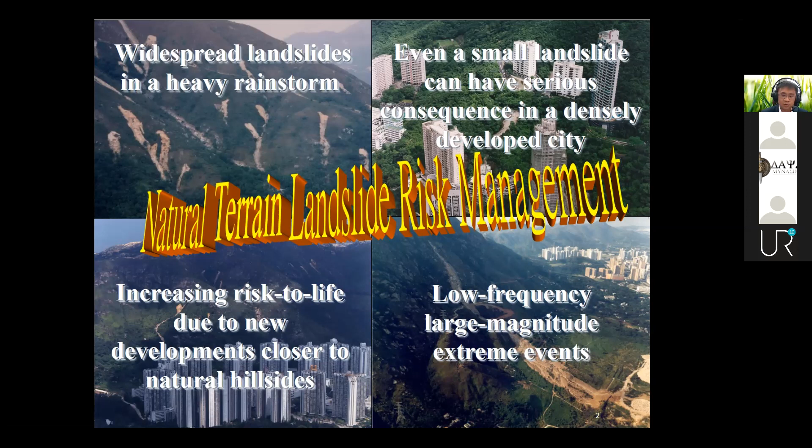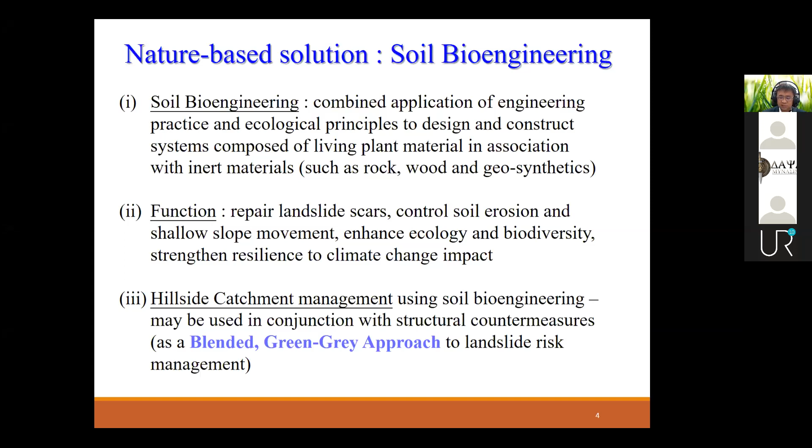Soil bioengineering, as defined in the first bullet point here, is one form of nature-based solution. Soil bioengineering measures may be used to repair landslide scars, reduce soil erosion, and prevent shallow slope movement, as well as to enhance biodiversity and resilience to extreme weather events. Where appropriate, soil bioengineering may be used in conjunction with sizable structural countermeasures as a blended green-gray approach to manage landslide risk.

Let me now take you through 2 demonstration sites in Hong Kong, showcasing the application of soil bioengineering to repair landslide scars on natural hillsides. The first site is at Cloudy Hill.

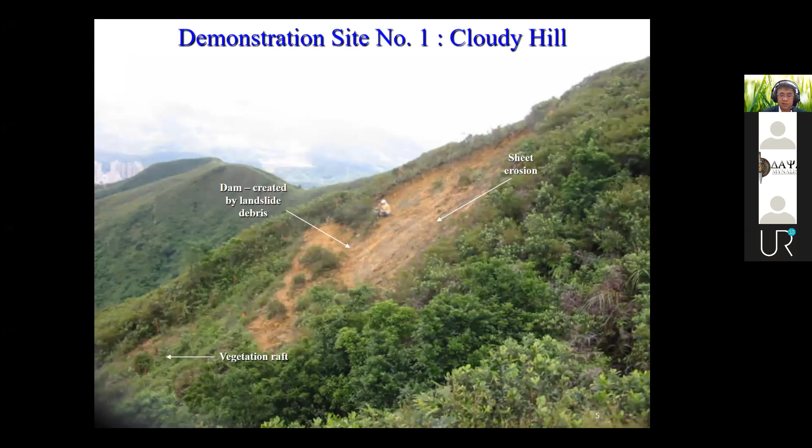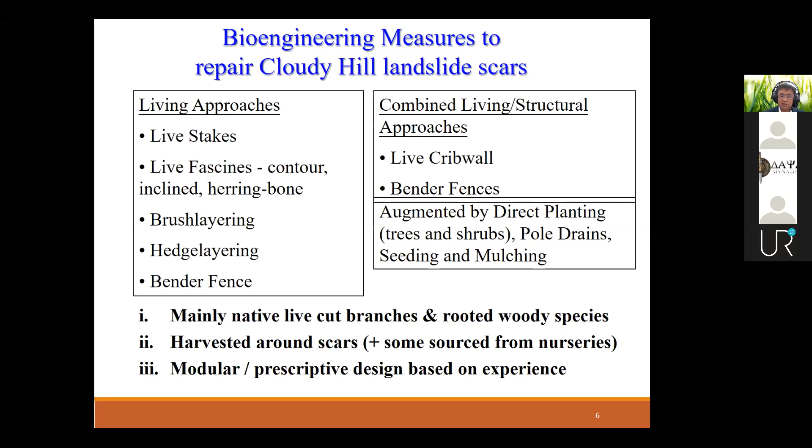This is a summary of the range of soil bioengineering measures provided, which involved mainly the use of native rooted woody species, together with native live-cut branches that were harvested from around the landslide scars. A modular design approach was prescribed by the designer based on detailed site mapping and experience. Here are some pictures of the site works in progress during the installation of the various measures.

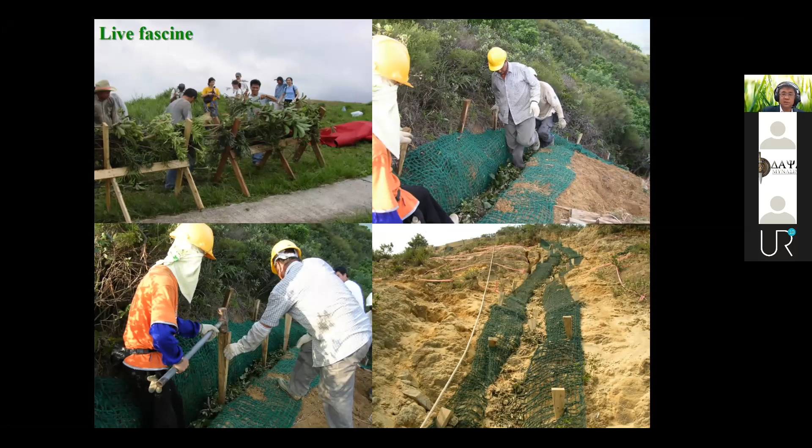Comprehensive performance monitoring is essential for quality data and improved understanding of actual performance. For example, we observed that in general, rooted plant outperformed live-cut materials in terms of short-term survival rates.

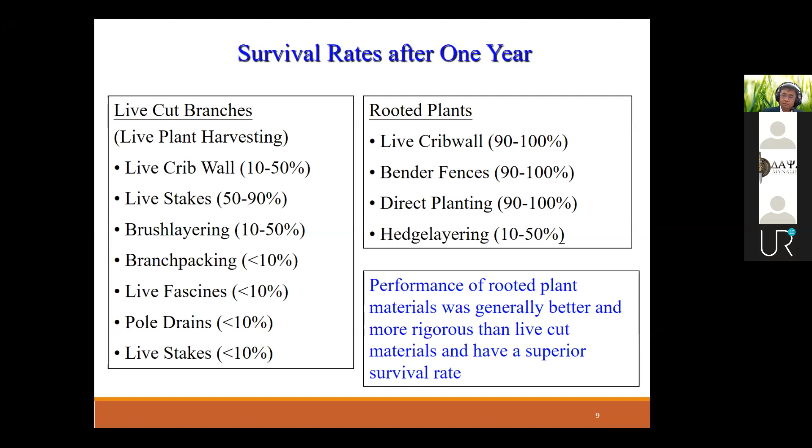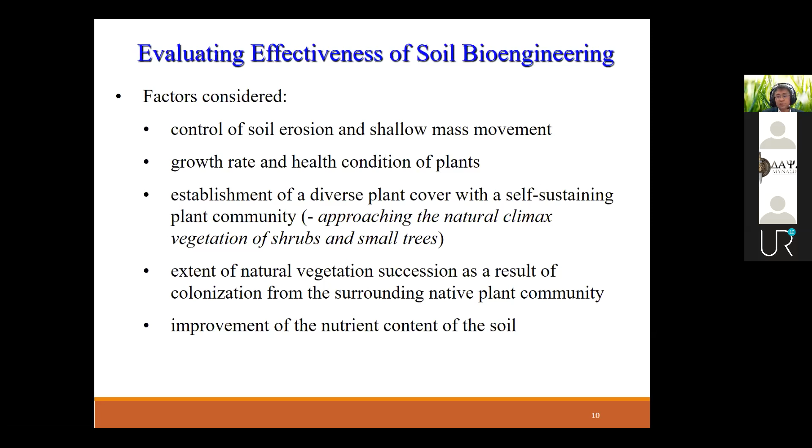In evaluating the overall effectiveness of the various measures, we considered systematically a range of factors such as control of erosion, establishment of a diverse plant cover with a self-sustaining plant community, improvement of the nutrient content of the soil, etc.

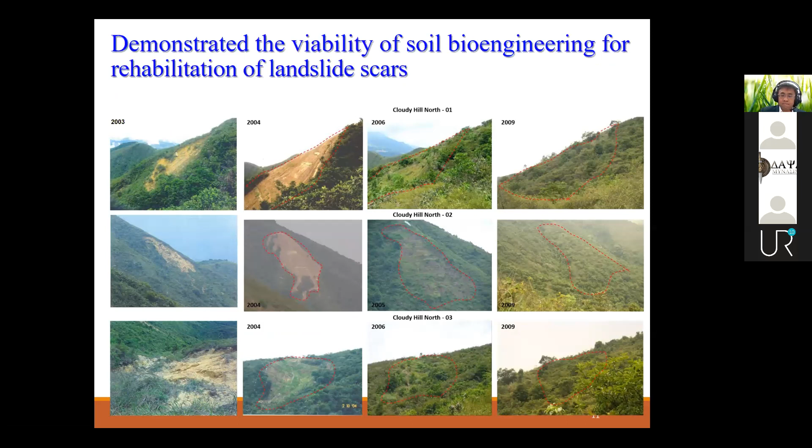The second site is in Upper Keung Shan, where soil bioengineering measures were used to replace the shotcrete cover provided to the extensive natural terrain landslide scars during the emergency repair works.

The design of the soil bioengineering works involved careful matching of suitable measures to the local site conditions, with collaborative input by the design team, comprising geotechnical engineers, ecological professionals, and arborists.

And again, locally harvested native plant materials were used as far as possible, supplemented by suitable species from nurseries.

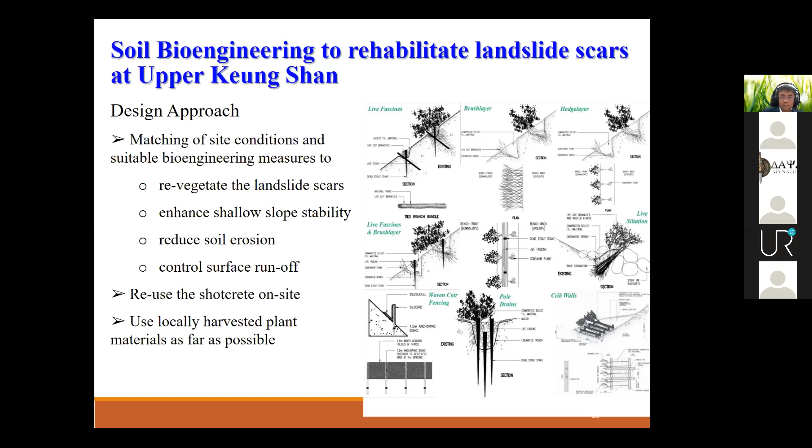The enhancement of biodiversity and ecology was achieved primarily through judicious selection of native species with suitable habitat characteristics, including the ones as shown at the bottom of this slide.

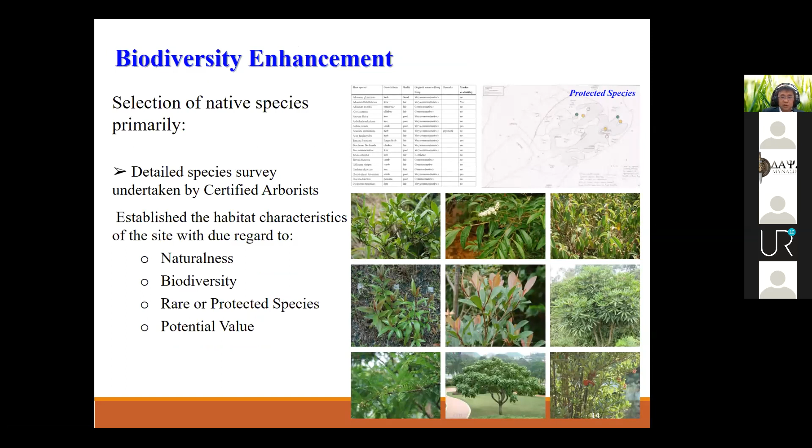To promote waste recycling, active reuse of shotcrete on site was implemented for the construction of pole drains. In total, some 250 cubic meters of shotcrete were reused.

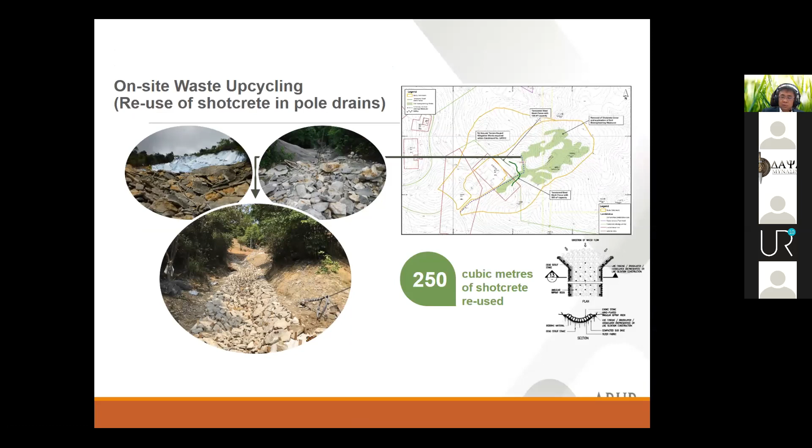The overall outcome is pretty good so far, with the gray outlook being gradually turned back into a green outlook, together with enhancement in the ecology and biodiversity.

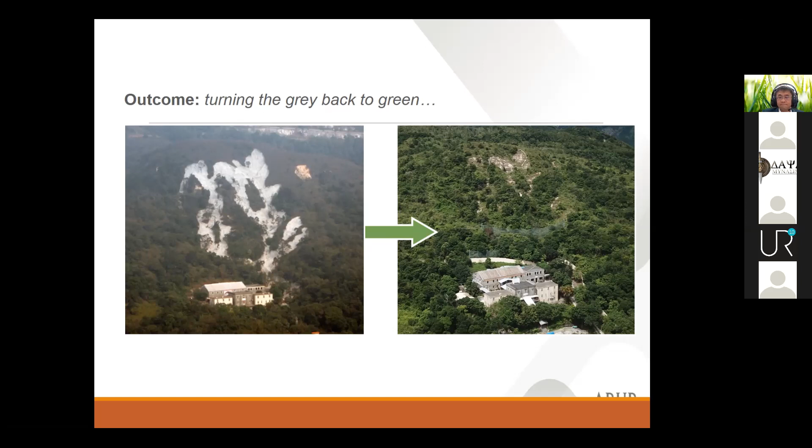We in the Geotechnical Engineering Office have promulgated best practice guidelines on the application of soil bioengineering to landslide scars, as well as the provision of a sustainable vegetation cover to man-made slopes. These guidelines are intended to promote the upscaling of the application of soil bioengineering and green landscaping treatment as a nature-based solution in practice.

And the policy of the Hong Kong government is to make the slope cover as green and as natural as possible.

Nature can also be our teacher, and it can inspire us to develop innovative measures for landslide risk management. For example, current research in Hong Kong is examining the potential use of the bioshield concept, which comprises a network of engineered mature vegetation acting effectively as a green, flexible buffer to dissipate the energy of debris flows. We are doing flume tests as well as centrifuge tests on these, with joint input from geotechnical specialists as well as ecological experts.

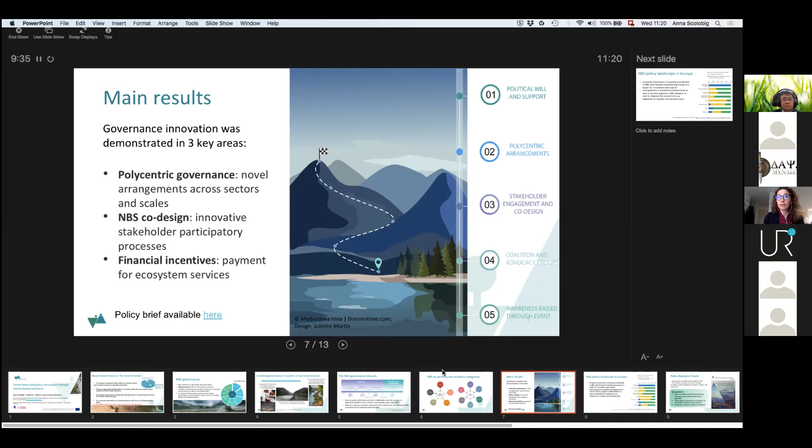Another key element was co-design and involvement of different stakeholders, which had key benefits in terms of local conflict reduction and overcoming decision stalemates. Financial incentives, like payment for ecosystem services implemented in the Chinese case, also made a real difference. There were other key enablers, and here I'll mention only the critical role played by local champions and advocacy coalitions and groups that were really driving the implementation of NBSs.

Another key aspect strongly related to governance at the local level is policy. We need robust policy and legal instruments and frameworks that allow nature-based solutions to be implemented. Our analysis here focuses on the landscape in Europe. The European Commission is investing considerably in NBSs with the goal of positioning Europe as a leader for innovation with nature, but very little guidance is provided on many aspects - for example, how to monitor progress in NBS adoption, how to integrate the concept into other types of planning, and how to integrate NBS planning more generally with other urban plannings.

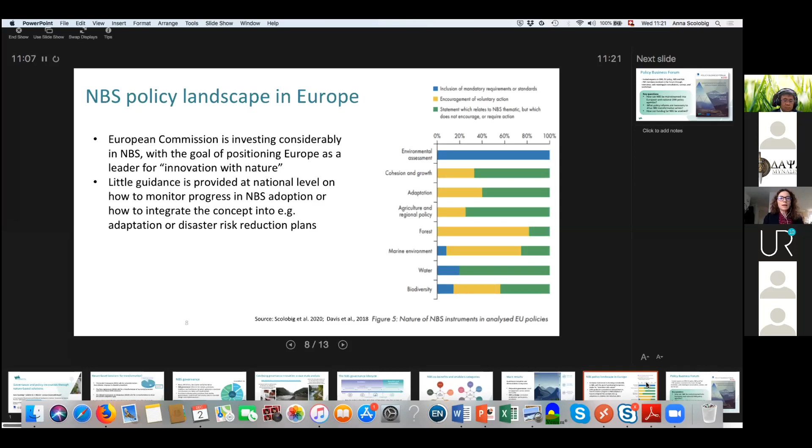In our project, we worked with a number of experts in academia, but especially in the private and public sector, to better understand these aspects related to governance and policy innovation. We set up a policy business forum and addressed questions related to how we can mainstream NBSs into policies, and what policy reforms are necessary to drive transformative actions.

And also their use of different NBS definitions can generate inconsistencies or confusion in the acquisition of possible funding. But here in the next slide, before concluding, I will focus on one key element, that is the fact that many European policy mechanisms enabling NBSs remain voluntary with no legal obligation to comply. And some of our experts mentioned some ways to foster NBS enforcement.

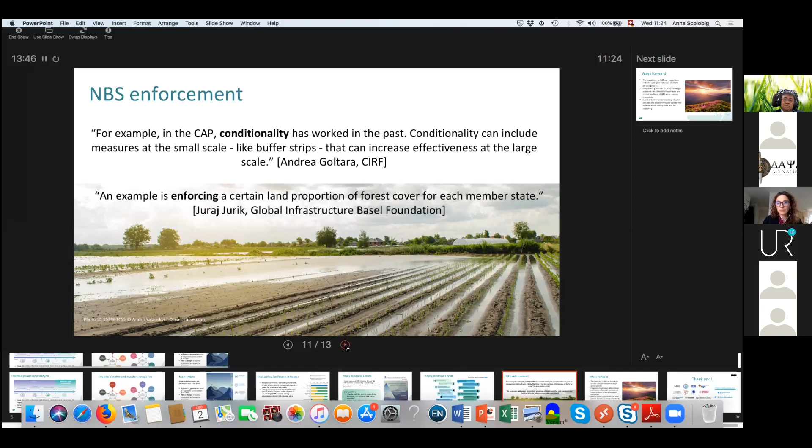For example, focusing on the Common Agricultural Policy in Europe, conditionality has worked in the past, and some measures like buffer strips at the small scale can increase effectiveness at the larger scale, and this can benefit not only agriculture but also flood risk reduction, for example. Another example is the enforcement of a certain land proportion of forest cover for each member state. So these are some directions that we should pursue if we really want to foster a transition towards more effective NBS policies and governance.

So now, summarizing my presentation with three key inputs on ways forward. As we have seen, the transition to NBSs can contribute to build synergies between multiple agendas, not only at the global level, but also at the local and regional scale. If we want to foster governance innovation, we have shown how some key elements are polycentric governance arrangements, promotion of co-design processes, and of novel financial incentives. And we also need to work more on how we can innovate and change the policy instruments that we have at our disposal, with a specific focus on NBS uptake and upscaling.

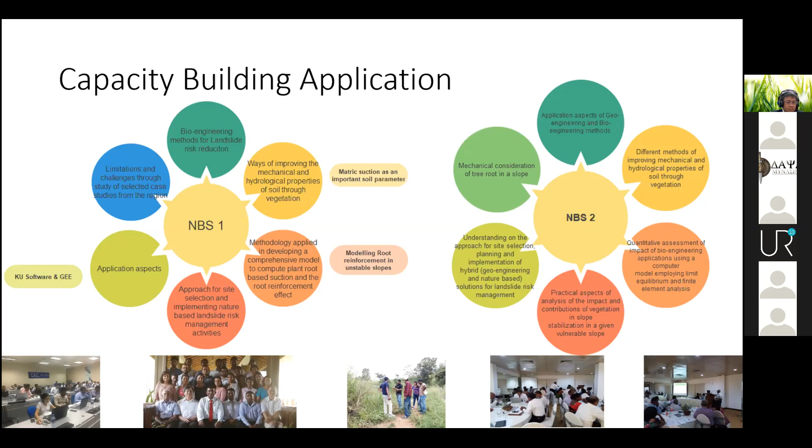So capacity building applications. Different types of training programs were conducted for promoting nature-based solutions for landslide events. In addition, basic level and advanced level knowledge building programs were conducted to provide more technical know-how on nature-based solutions. Computer-based applications such as KU software and Google Earth Engine were discussed to estimate and gather data for assessment purposes. Bioengineering methods, ways of improving mechanical and hydrological properties of the soil through vegetation, and computing plant root-based suction are the key subject areas in these training programs. In addition to that, group works and on-site training were conducted to understand the theoretical and practical backgrounds.

Analysis of plant species. The identification of relevant plant species is one of the key elements in this project, and for that we have identified a criterion to rank the plants. The criterion was based on a few variables: plant type and structural characteristics, economic values, ecological significance, root strength characteristics, and hydrological significance. Each variable was divided into several categories, and 1 to 5 marks were assigned in ascending order. The plants receiving the highest marks were the most suitable plants.

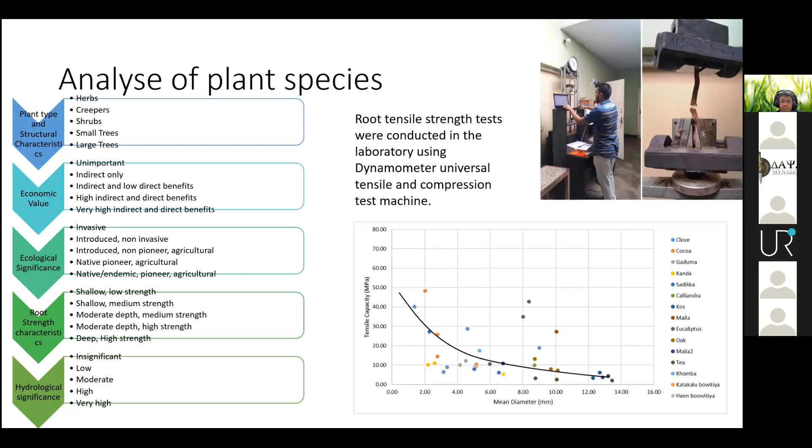Then a plant manual was developed for selecting the suitable plants for the nature-based landslide mitigation works, and the way of selecting the plants was also developed. According to the process, the plants have been identified by considering the different site-specific data mentioned in the presentation.

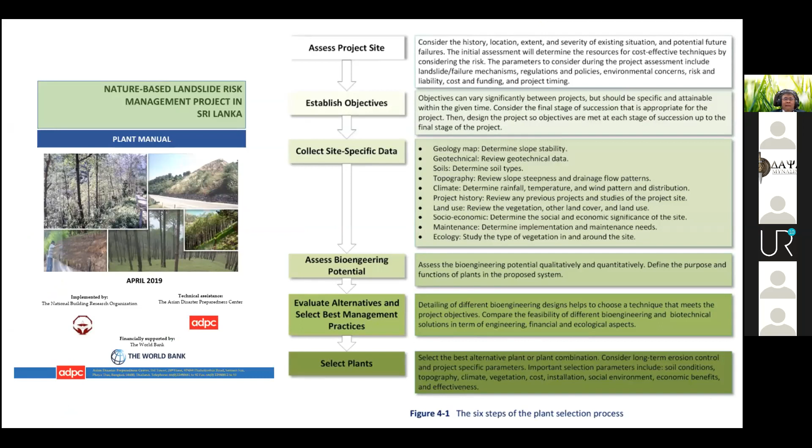The site selection criteria were developed to apply the knowledge into real practice, and for the first phase, 2 sites were selected, and 4 sites were selected for the second phase. These sites were selected by evaluating 15 sites around the country. The selection criteria consisted of depth to failure plane, slope category, suitability of creation of vegetation cover, sustainability and maintainability, and finally potential damage or probable loss.

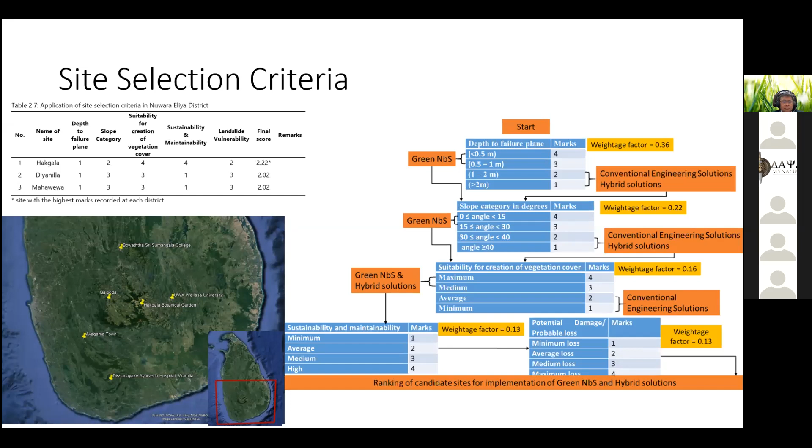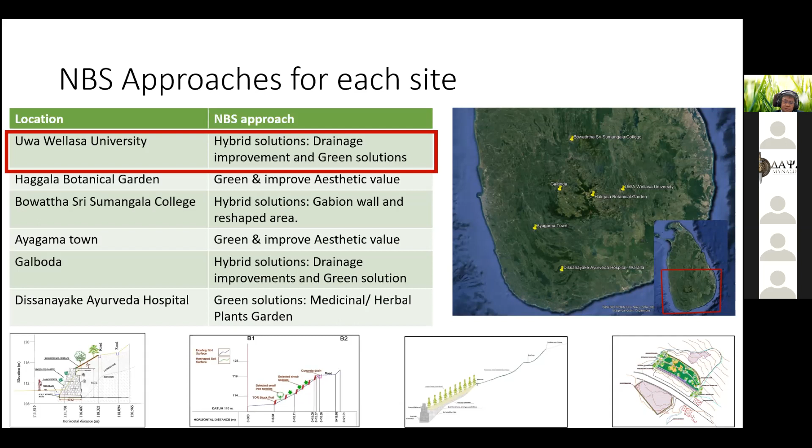perspectives. Here we are expected to brief about the first site, which is located near the Uva Wellassa University of Sri Lanka. The village name is Badulusirigama. This site is located in Badulla, which is the administrative city of Ella, a famous tourist destination in Sri Lanka. The land movements were detected 30 years ago, and afterwards a few movements were recorded.

Considering the vulnerability of the area, 95 housing units, around 355 people and infrastructure facilities were vulnerable elements due to this landslide. Considering the social status, the majority are male-headed families, and most of them are government sector employees. Most of the buildings are residential and constructed with load-bearing walls, and most houses have systematic drainage systems to control the wastewater.

69% of buildings are located on the gentle slope, and 42 housing units have landslide symptoms. The weakest point was that 71% of respondents say that they didn't receive any preparedness instructions. The landslide map program also identified that the area has significant hazard activities.

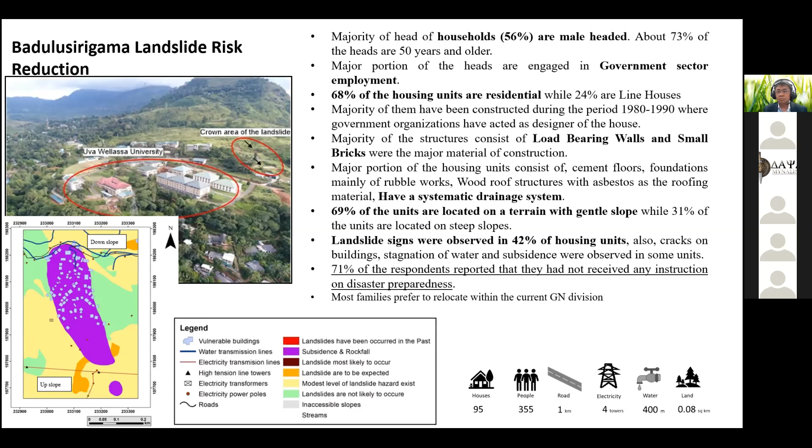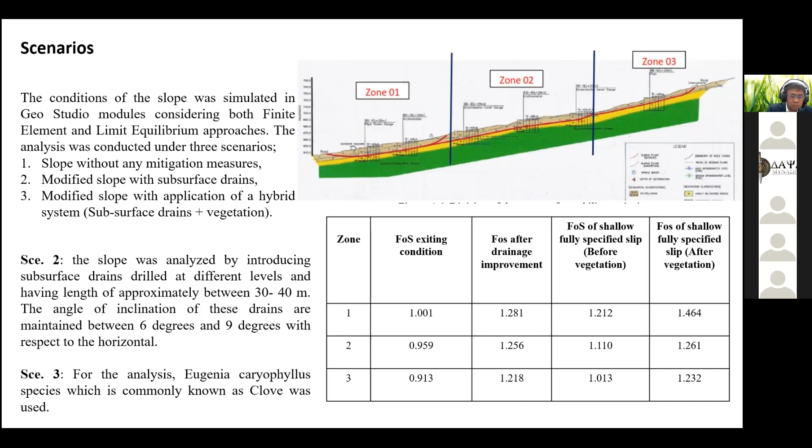Then the conceptual map was developed, and activities were identified by considering several stakeholder discussions. Accordingly, drainage improvement was conducted on the slope area, and the total area was divided into 3 zones: a community engagement zone, a university engagement zone, and the nature park with some nature trails. Now this plan is implemented on the

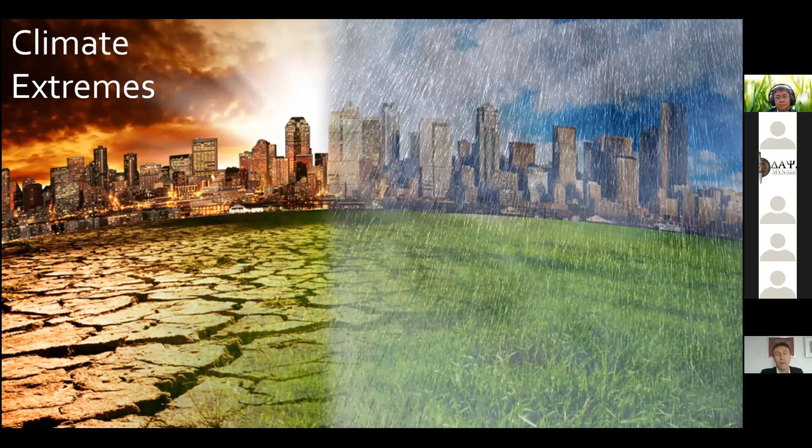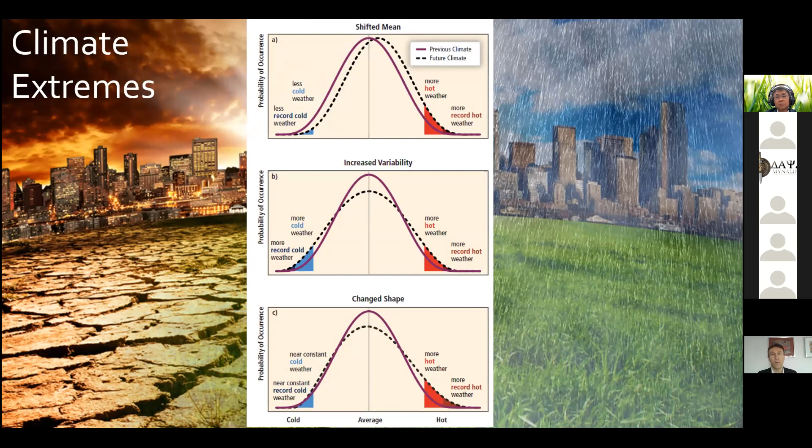Basically, as an introduction to this, I don't think I need to spend much time saying that there's so much evidence that we are facing quite some climate extremes nowadays. Once upon a time these used to be from one year to another, but now we have many examples around the globe where people within one season experience two wet periods and then two dry periods. As a consequence of that, we have seen some major events occurring around the world.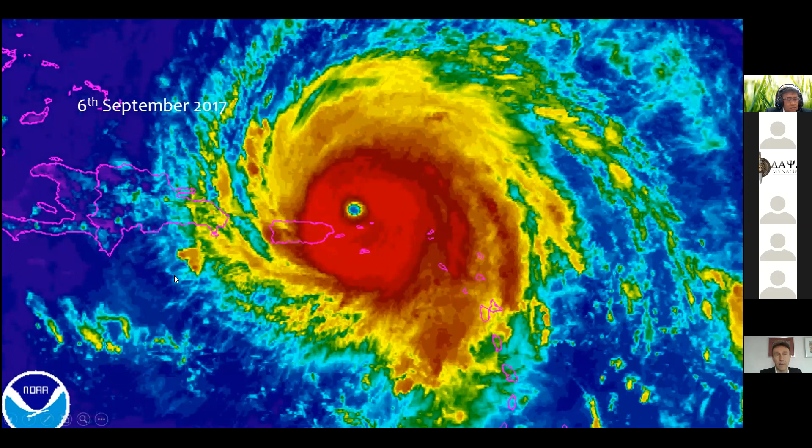This is the 2017 Hurricane Irma that struck the island of St. Martin, which is coincidentally one of our case studies in the RECONECT project, and caused enormous destruction to that island and also to some other neighboring islands in the Caribbean region. In 2013, before Hurricane Irma struck St. Martin, there was Typhoon Haiyan that hit the Philippines. Up until 2013, it was estimated to be the most severe typhoon, which in the Caribbean region is referred to as a hurricane event. But then Irma got the new number one spot on the chart of these extreme events.

In terms of the other kinds of floods, we've seen in 2011 the Thailand floods that took a really massive toll on Thailand for a period of two months. Again, this is one of the cases that we have in the RECONECT project, and the damages and repercussions were severe in the aftermath of this event.

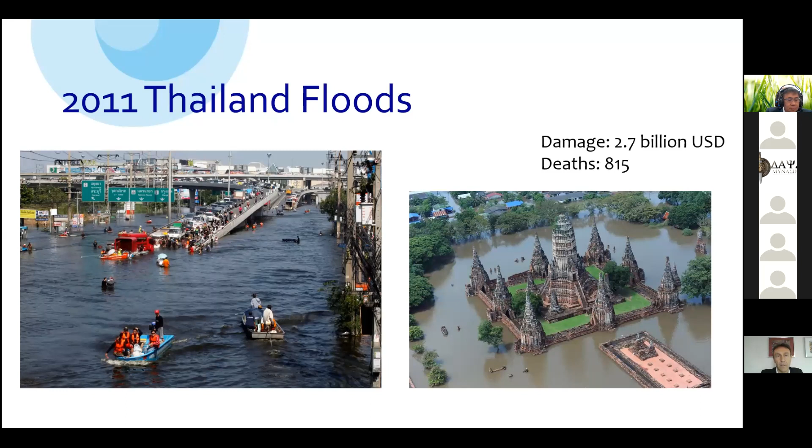On the other hand, we also cannot forget that we've had some very impactful heat waves that took place in 2003 and also in 2015. The number of deaths due to heat waves was in the order of 70,000, and massive economic damages were imposed onto critical infrastructure and other infrastructure. So we are facing situations where we have too much water, and then also too little water.

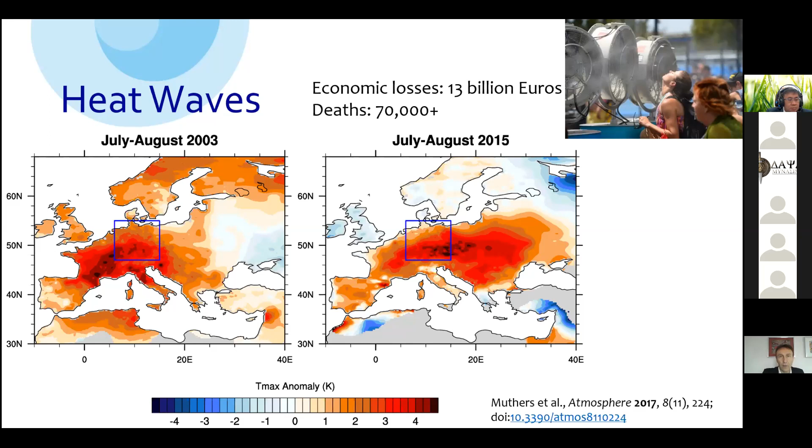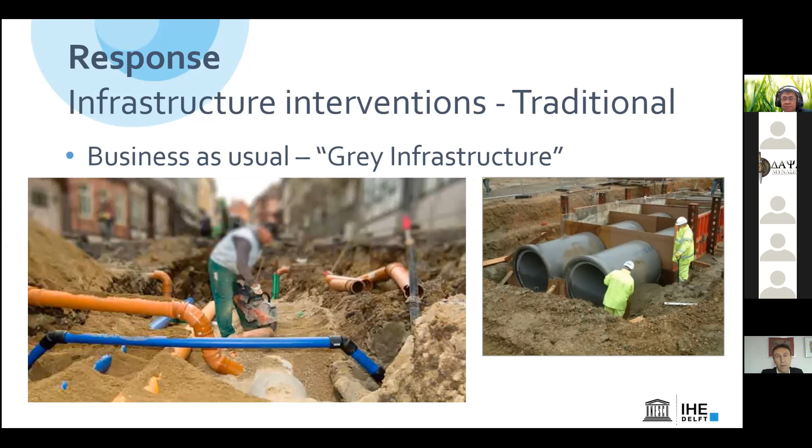Now, the traditional response to these events has been very much the so-called gray infrastructure measures, which we can divide into small scale and large scale. This is an example of small-scale gray measures, which are typical for urban areas, with pipes being the classic example. But then we also have large-scale measures. A traditional one can be a dike. Of course, if it is done with traditional means, without ecological or innovative approaches, it can be seen as gray infrastructure that has been used along rivers and also along coastal areas.

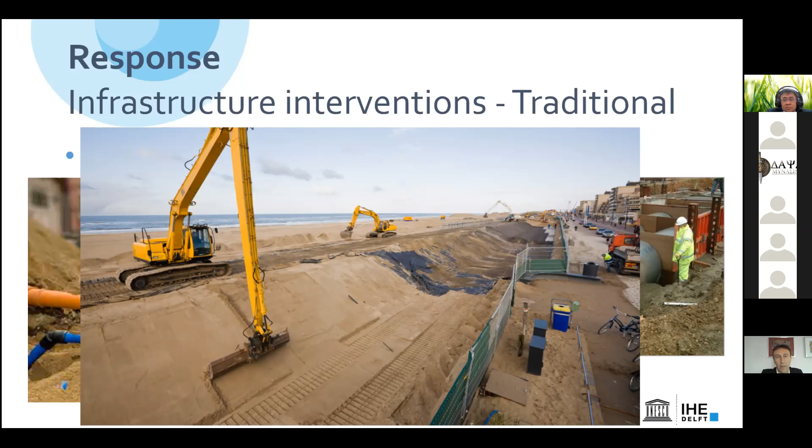So nature-based solutions have emerged as a response, because we want not only to take the water from one place to another as fast as possible, as was the case with traditional measures, but rather to retain this water for dry periods, to mitigate heat stress and improve the microclimate in urban areas, and for agricultural and other benefits in rural areas. So the mentality has changed from trying to take the water as fast as possible from one place to another, to rather retaining the water and processing it.

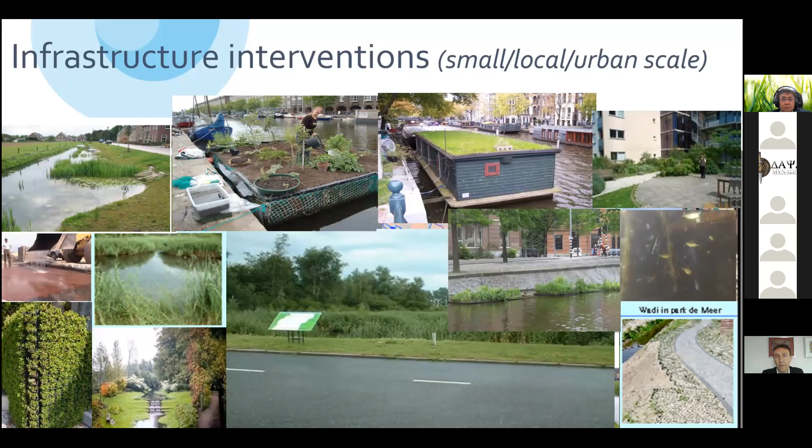This is an example of some small-scale, urban-scale nature-based solutions, like swales, green roofs, porous pavements, vertical gardens and rain gardens, and things like that. We also distinguish between small-scale and large-scale NBS. Large-scale NBS examples are afforestation or reforestation, retention or detention basins, ponds, wetlands, bypass channels, and things like that. In the RECONECT project, we are really looking at large-scale nature-based solutions.

There is a big difference in relation to hydro-meteorological risk reduction between small-scale and large-scale NBS. Small-scale ones are designed to handle small events, which are rather a nuisance and may not necessarily bring a wider disaster to the area. Large-scale nature-based solutions play a very important role because they are designed to retain and deal with large amounts of water, and therefore they have more potential to be used to prevent large-scale disasters.

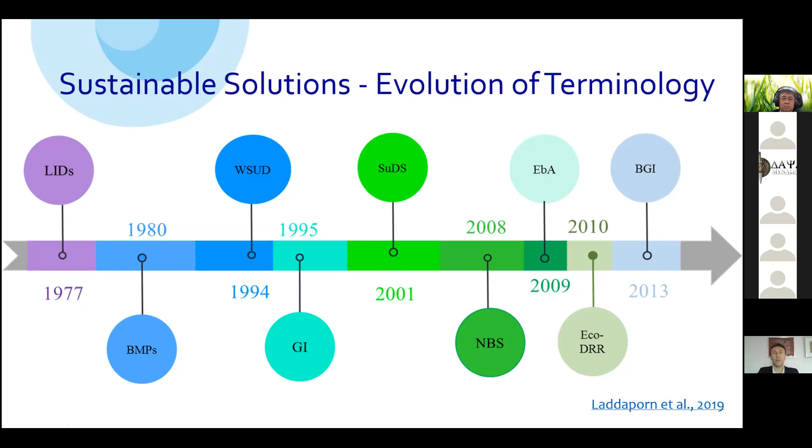Very briefly, in terms of the evolution of terminology, we can find in the literature numerous different terms used over time, which more or less all refer to the same kind of measures: nature-based solutions, nowadays the term used by the European Commission. We have low impact development in the US in 1977, best management practices, water sensitive urban design in Australia, sustainable urban drainage systems in the UK, and so on. All these terms are nowadays nicely converging into what passes as nature-based solutions.

Another thing which is very important with nature-based solutions is the multifunctionality and ability to provide numerous benefits and co-benefits. If we compare them with the traditional measures like pipes, the pipe has one single function, which is to take the water from A to B, whereas with nature-based solutions, we can achieve multiple benefits and co-benefits because they're built on the ground and they can be used for such things.

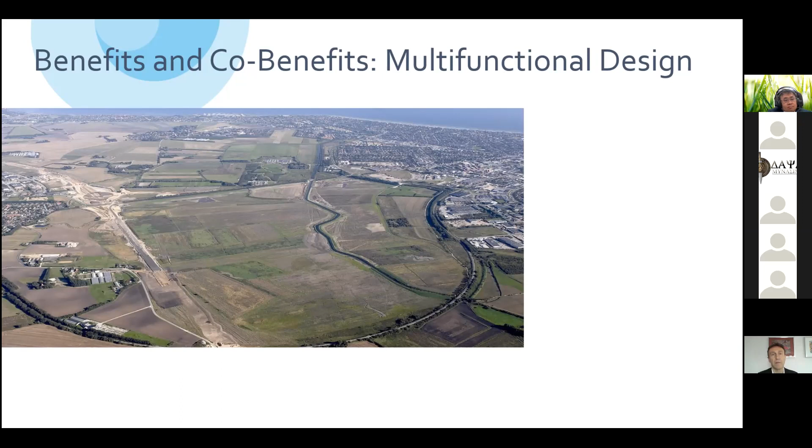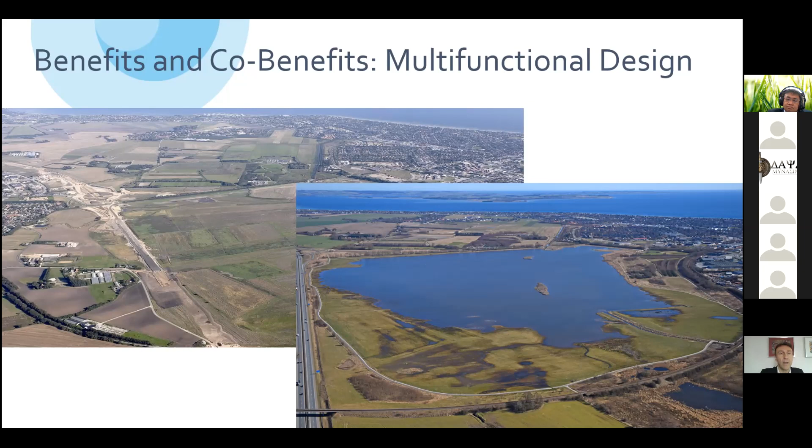This is how it looks when you get a large-scale flooding. So the water does not go to the urban area to the right, but rather stays within the lake. So that's one example of benefits. But of course, the co-benefits would be enhancement of biodiversity, and social benefits in this area would be recreational and other activities that this particular area offers. So besides, as I mentioned, the primary objective, which is the hydrometeorological risk reduction, the co-benefits in this context are related to biodiversity and also social and human well-being.

Very quickly, about the project. The RECONECT project combines 36 partners with about 14 million euros contribution from the European Commission, and the overall value of works is in the order of 40 million euros. We have 10 demonstrators where we are demonstrating large-scale nature-based solutions, and we have a number of what we like to call collaborators in Europe and abroad, where the idea is that we are replicating and upscaling these measures and developing the so-called NBS master plans for these locations.

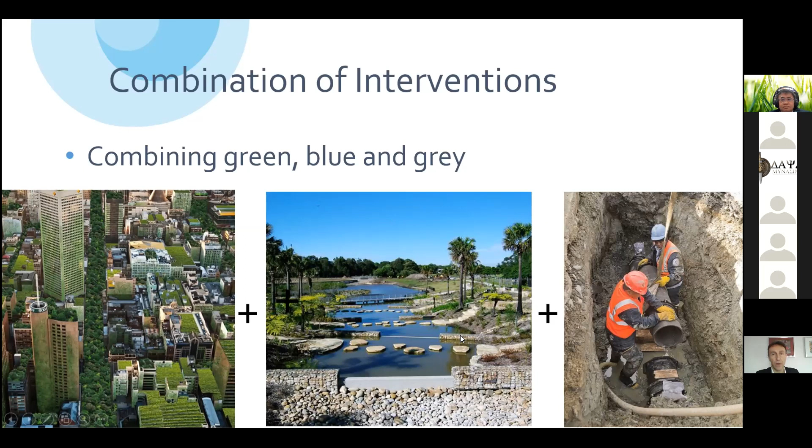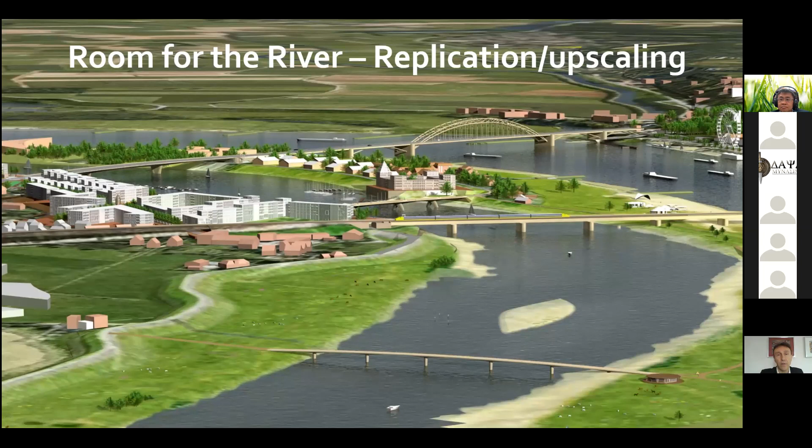And for example, we are taking a number of examples in Europe. This is from the Netherlands, the program called Room for the River, where this is an example from Nijmegen, where you see the area which used to flood quite regularly, but now with the provision of the bypass channel and adjustments of the floodplains, basically there has not been even a single flood incident, and there are so many nature and also social benefits that have been observed.

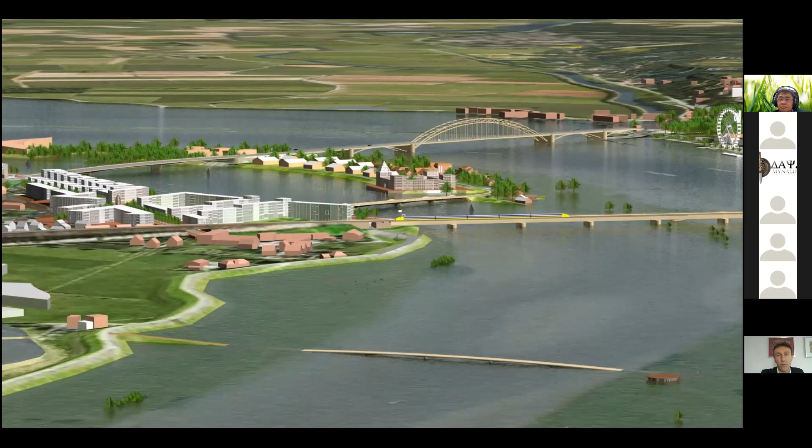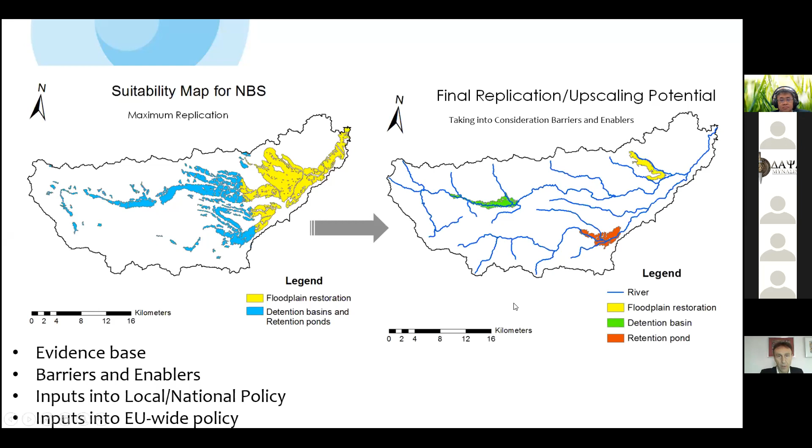So in this project, we are taking the measures that we can replicate, and as in the previous presentation, Anna talked about enablers and barriers. We are looking where these enablers and barriers can play a role, and how much these measures can be replicated in our collaborators and also other parts of Europe. Very last, I want to finish off in a couple of minutes. I show you also the range of measures we are looking at.

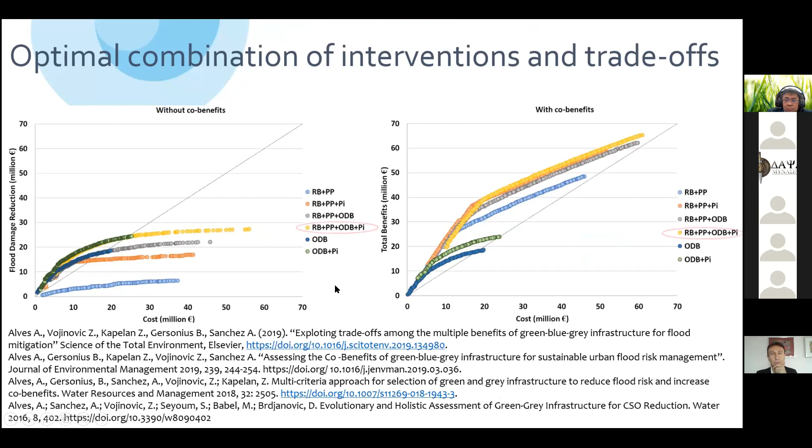I started the presentation showing the massive hurricane impact on the island of Saint Martin. We are not only looking at river-related nature-based solutions, but we are also looking at the coastal areas. And we are using this example from Saint Martin, which was really, really severely hit by the hurricane. Back then, we have done all kinds of hazard, vulnerability, and risk assessment. And we identified areas which are more prone to flooding. And then we looked into some trade-offs between different measures with and without benefits or co-benefits. And we looked at a combination of the inland measures and also the coastal measures.

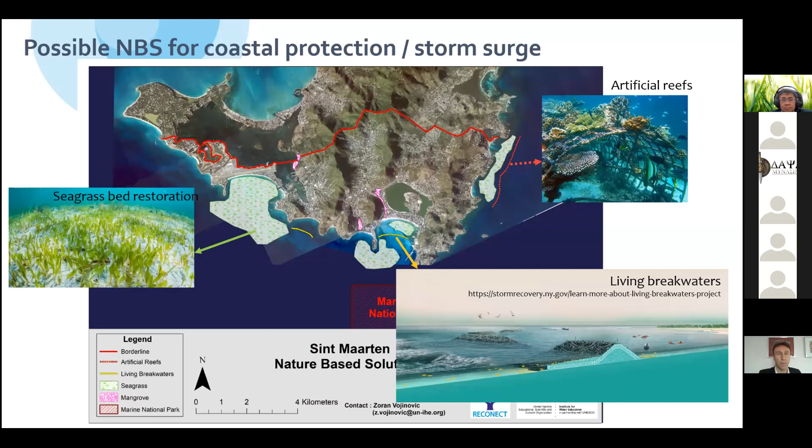And for the coastal side of the story, we are looking at artificial reefs, living breakwaters, seagrass bed restoration to dampen some of the potential coastal waves that affect the area, and also mangrove restoration.

So to conclude, in the RECONECT project, we are really looking at the potential of NBS in the sense of producing the evidence base, and looking at the replication and upscaling of these measures throughout Europe, but also outside, by combining the measures, comparing their trade-offs, working alongside stakeholders to design multifunctionality, robustness, adaptivity, and flexibility of such measures. So this is, in a nutshell, the RECONECT project and the work we are doing in relation to NBS.

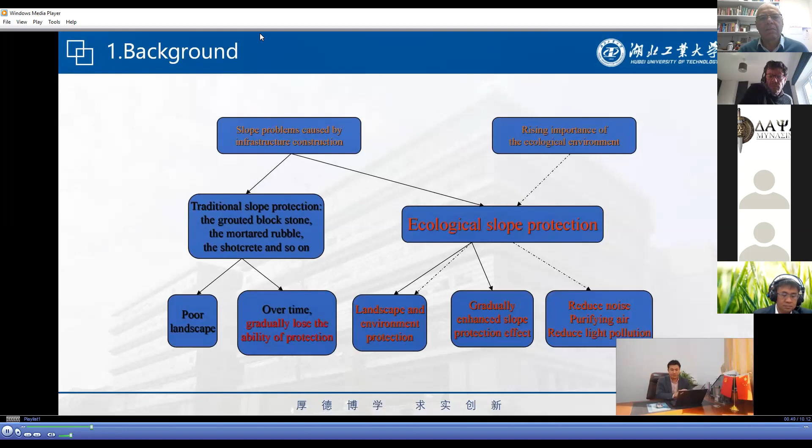Firstly, I talk about the background of slope ecological protection. With a large number of infrastructure projects accompanying social development, mining and construction of highways, railways, and hydropower stations produce a large number of artificial slopes, which bring about problems such as soil degradation, landslides, and ecosystem damage.

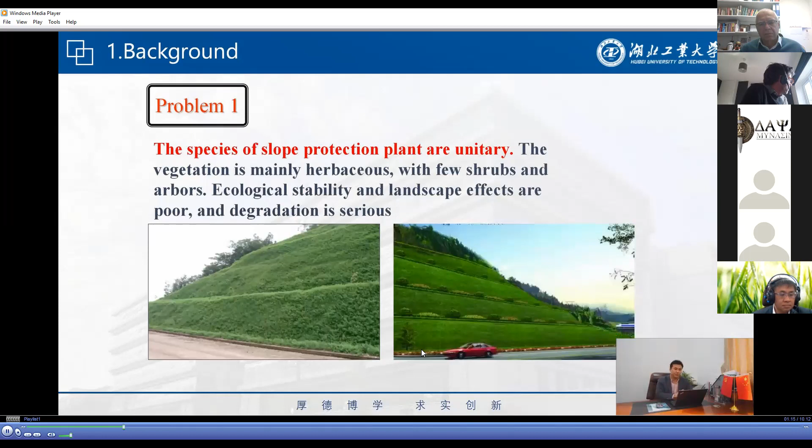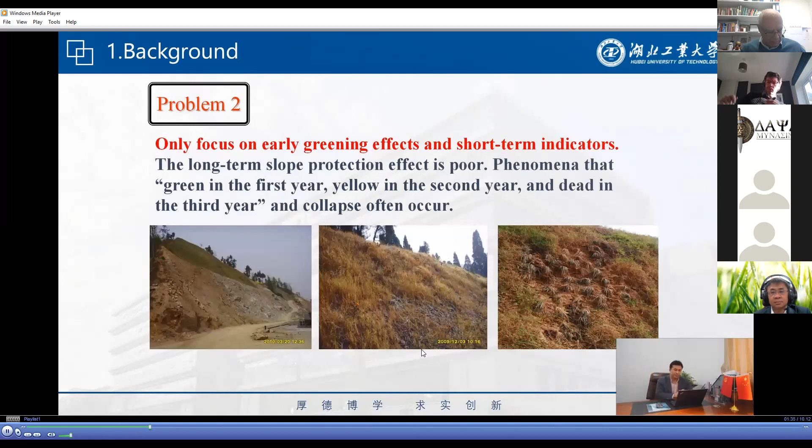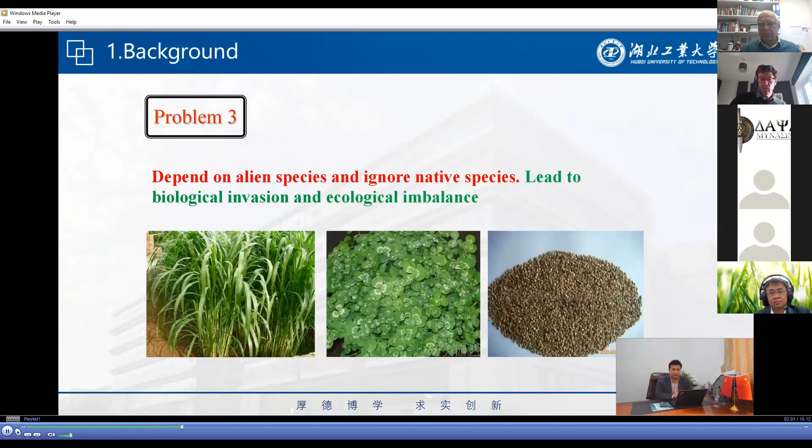Because of worsening conditions, the slope protection capability of this traditional method gradually declines over time. And as people become more aware of the ecological environment, the terrible landscape effect of the traditional slope protection method cannot meet the requirements of people. Is there a new slope protection technology that can overcome the shortcomings of the traditional approach?

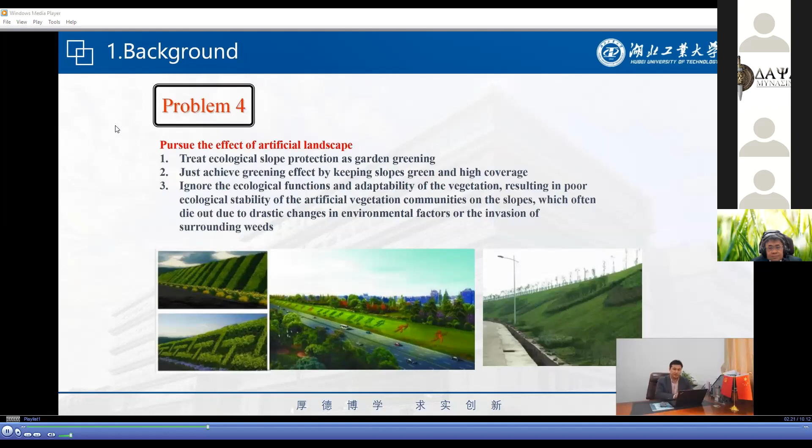The answer is yes. The new slope protection technology is the ecological slope protection method. At present, there is no accurate definition of ecological slope protection worldwide. Its purpose is to use live plants alone or combine them with non-living vegetative materials to reduce slope instability and soil degradation.

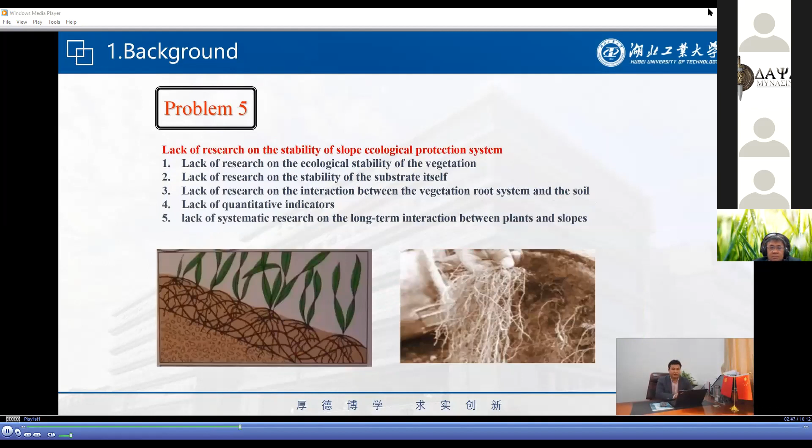The ecological slope protection method is the main work of our team, and this is the second part of our presentation. In this part, I will introduce the work of our group from three aspects: ecological protection theory, mechanics, and technology.

For the ecological protection theory, we promote the original ecological protection theory, which is to use excellent plants near the slope to restore the vegetation system of the slope as much as possible, similar to the original ecosystem.

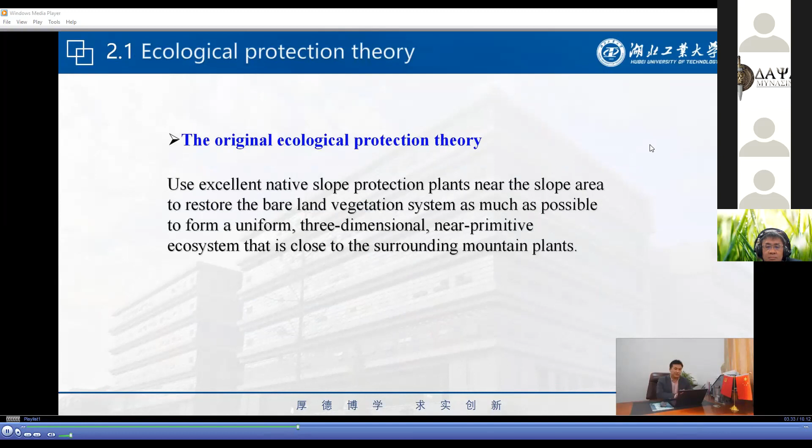For the natural environment in Hubei province, we selected 9 kinds of excellent slope protection shrubs, 4 types of excellent slope protection herbs, and 3 types of perfect slope protection vines, based on 7 ecological function factors, including cold tolerance and barren tolerance. After that, we used the selected plants to conduct ecological slope protection model tests.

Then we performed the above-ground biomass analysis and coverage analysis of the plants on the test results. Finally, we used the comprehensive evaluation index method based on the analytic process to evaluate ecological stability.

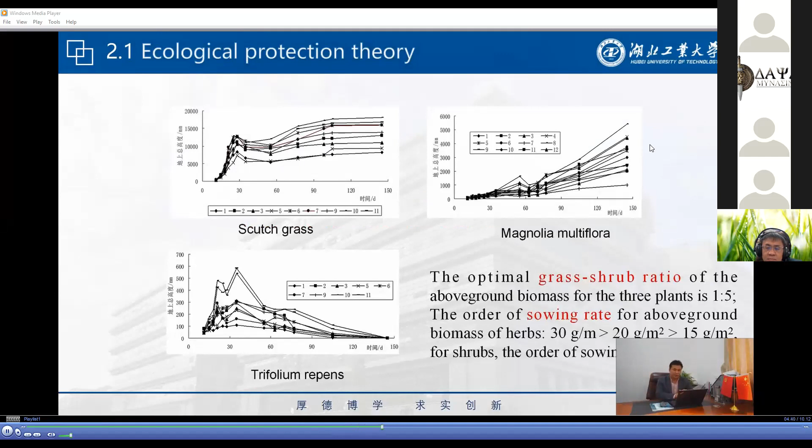We conclude that the optimal grass-shrub ratio is 1:5, and the optimum sowing rate is 20 grams per square meter. We have obtained the mechanical properties of herb roots and shrub roots through experiments.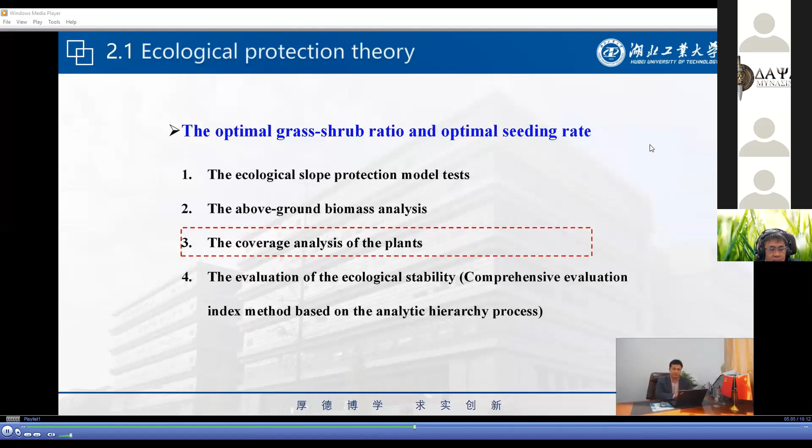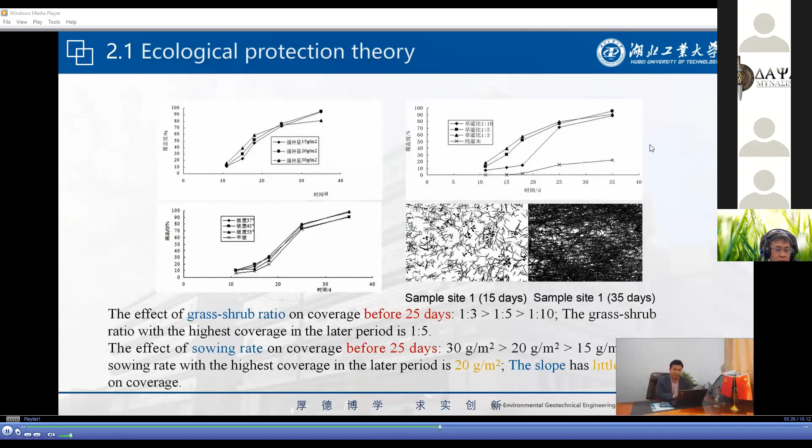According to 4 growth periods and 3 grass-shrub ratios, we made 12 types of root-soil complex. After comparing the shear test results of these complexes with rootless and undisturbed soil, we concluded that the shear strength of the root-soil complex is higher than that of the unrooted undisturbed soil.

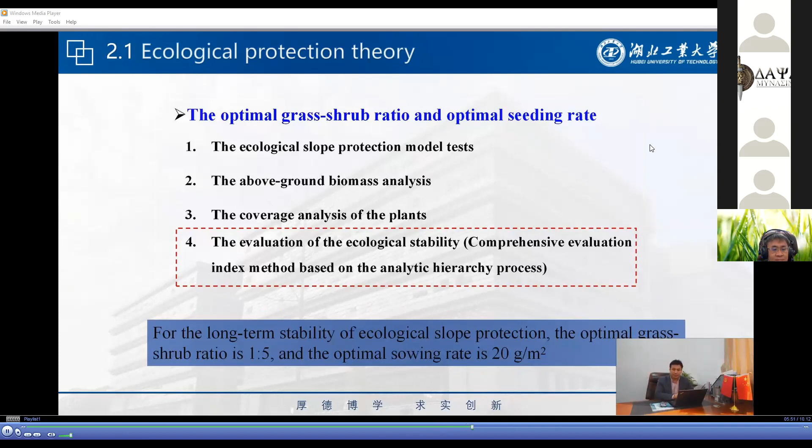With the middle growth period, the advantage of the reinforcement effect of the grass-shrub mixture is insignificant due to intense species competition. But with the short or long growth period, when the species competition is stable, the reinforcement effect of the grass-shrub mix is better than that of single herb or shrub root reinforcement.

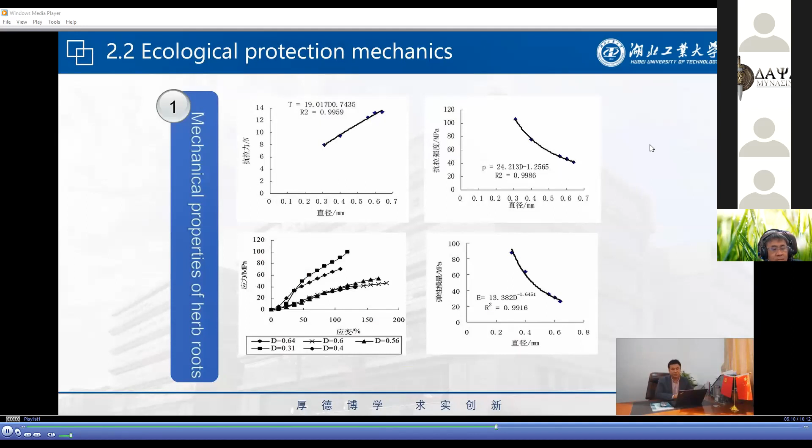The existence of roots increases the cohesion of soil, and the cohesion reaches its maximum in 90 days, which is about 3 times that of the undisturbed soil without root.

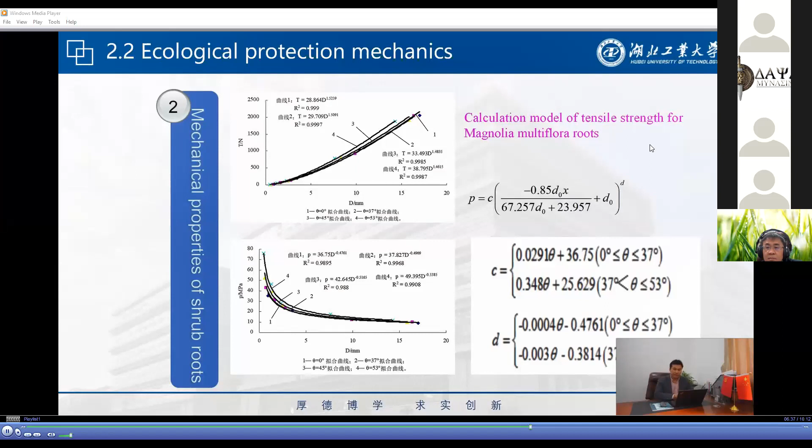Based on the results of finite element numerical simulation, the stability of the slope with vegetation is higher than that without vegetation, and this stability improvement effect becomes more evident as the slope becomes larger.

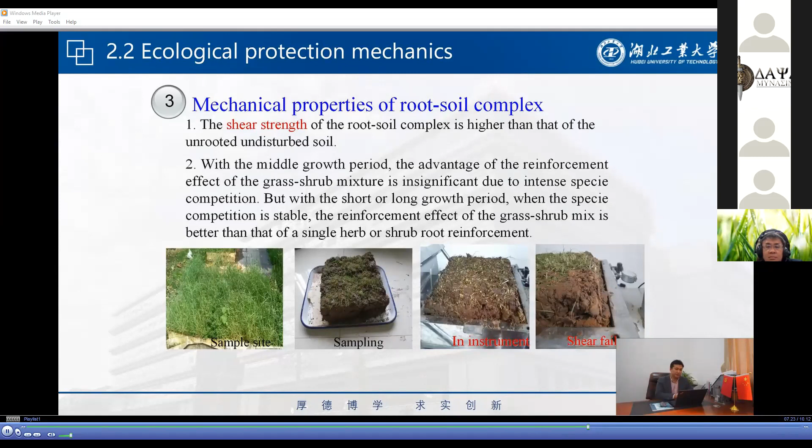We have developed a new slope protection strategy based on hollow green brick and anti-slide pipe, a new ecological slope protection technology of frame beam, a new type of vegetation concrete lattice, and a new kind of erosion control cover. For the first time, our team used waste incineration ash as a substrate for ecological protection and developed a reasonable composition of this new material.

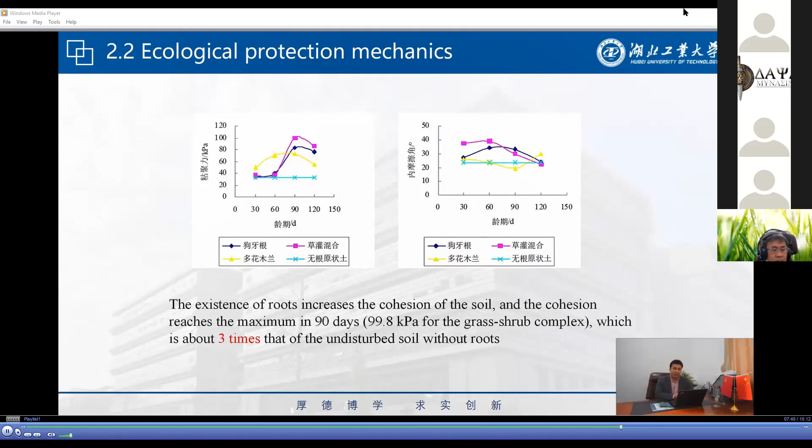Through shear stress and ecological tests of the substrate material with different ash content, we have studied the mechanical and environmental properties of the base material.

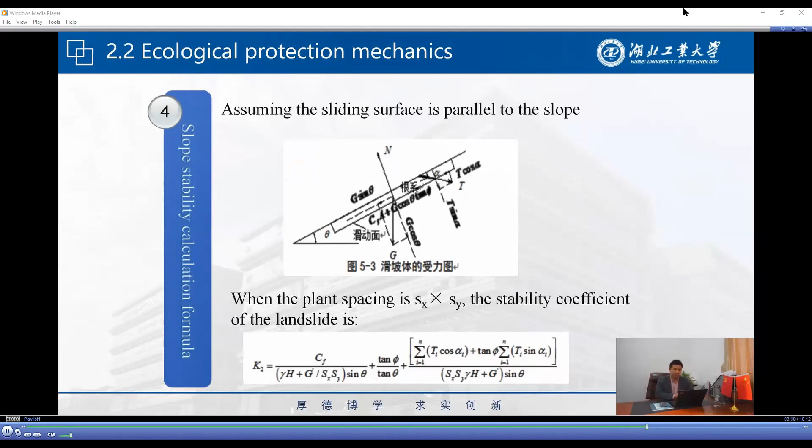Based on our research, the incorporation of fly ash improves the shear strength of the soil. When the ash content is 5% to 6.7%, the strength is much improved.

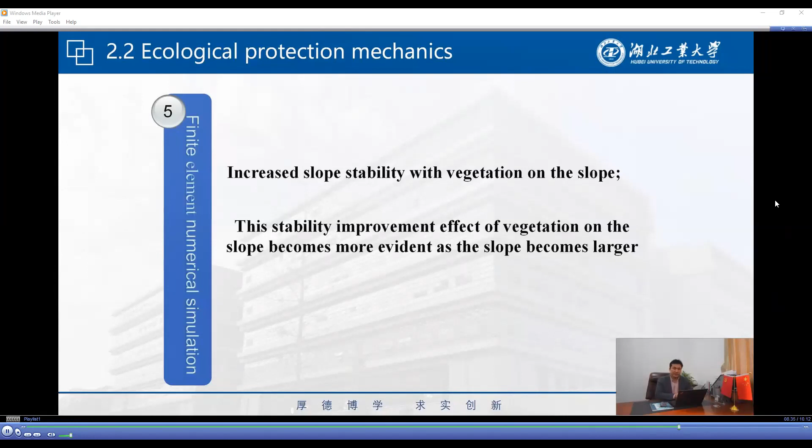The incorporation of fly ash affects the ecological performance of the substrate. Tests have shown that 20% ash content is an acceptable upper limit, that is, the ash content should not be higher than 20%.

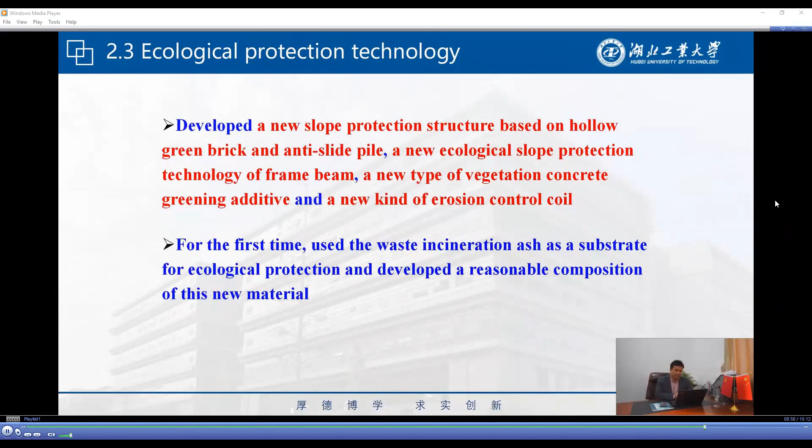Considering the mechanical and ecological indicators, about 10% of ash content is appropriate.

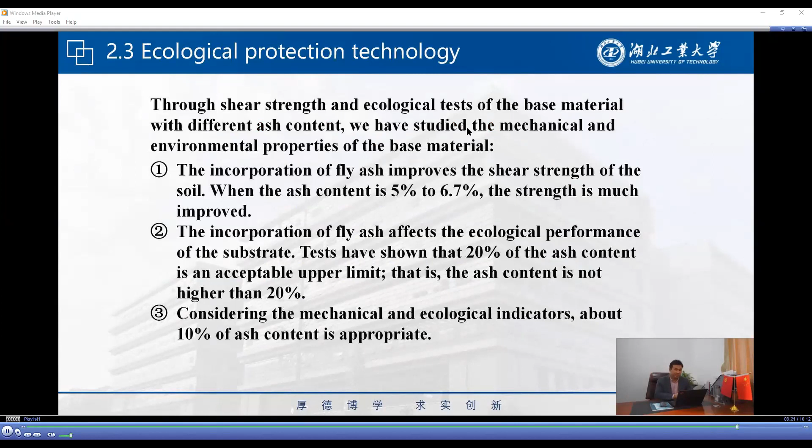Our research is supported by multiple scientific research programs from the government, and the new technologies developed have been widely used in China. We have obtained 15 invention patents and established 3 industry or local standards, and our team has won 6 scientific research awards in China.

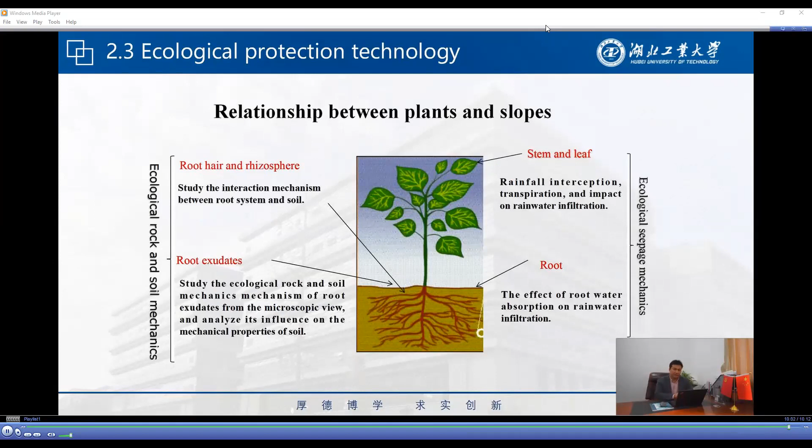This is the final part of my presentation. I want to talk about prospects. Next step, our team will study the relationship between plants and slopes, such as the influence of plants on the infiltration of rainwater on the slope, and the interaction between the root system and the soil.

Thanks for your attention.